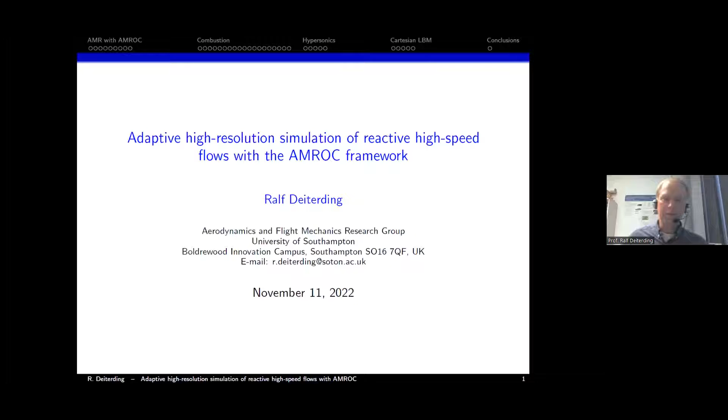Thank you very much for the very comprehensive introduction. I hope the connection will be working fine. If it goes down, I'll turn off the video.

You've seen the title of this talk. What's the motivation here? In this presentation, I want to explain the general sources that led me to the development of AMROC and what that system is about. It's a little bit larger than just combustion simulation. Let me start with an introduction covering my general thoughts.

What about CFD meshing? We are living in the third generation of CFD. The first generation used structured mapped grids, which are difficult to automate. The idea of AMROC always was to automate many of these procedures.

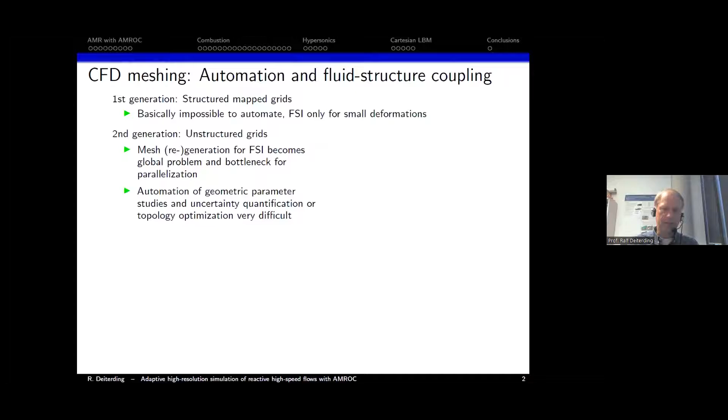The second generation would be unstructured meshes, with triangular grids. If you want to do fluid structure coupling—for instance, with a body moving through the domain—you get mesh stretching, and at some point you need mesh regeneration. This is naturally a bottleneck in such CFD simulations, because unstructured meshing is still basically a globally coupled problem.

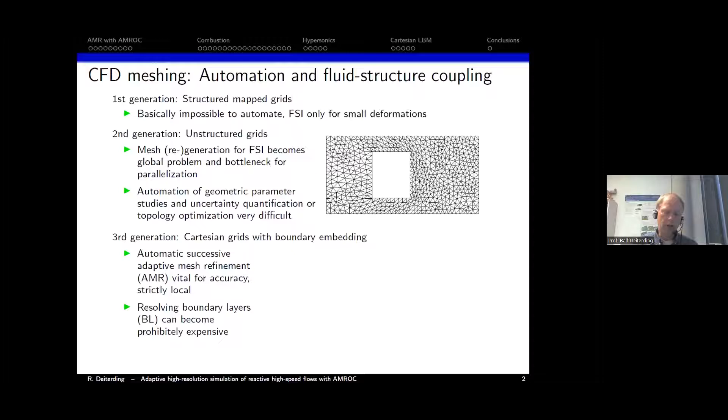Nowadays we live with what is called third generation CFD, which is about Cartesian grids where you can construct the grids much more locally and embed the boundaries, for instance with level set techniques. The problem there, as we'll see in AMROC extensively, is that you struggle incorporating viscous flows and boundary layers.

One direction we want to pursue with the software—and you'll see some indication of this in the presentation—is incorporating boundary layers through a type of overset mesh. The idea is to have a boundary layer mesh near the body, and in the background a Cartesian mesh with dynamic mesh adaptation. This approach nowadays is called strand meshing, where the core idea is that you grow the boundary layer mesh from an unstructured surface mesh, growing it in the normal direction. That's the overall idea I'm pursuing with AMROC.

I'll give some indication of these various approaches in the talk. Here's the outline: AMROC originally was an entirely Cartesian and structured system, and we'll see examples of what has been achieved. Nowadays we have also extended it to mapped meshes, and we'll see both of these in the big section on combustion simulation.

Then we come to a different class of reactive high-speed flows—hypersonics—where we have particular dissociation reactions. As a quick outlook at the end, I'll show how you can also use such a system to do quasi-incompressible flows with the Lattice-Boltzmann method.

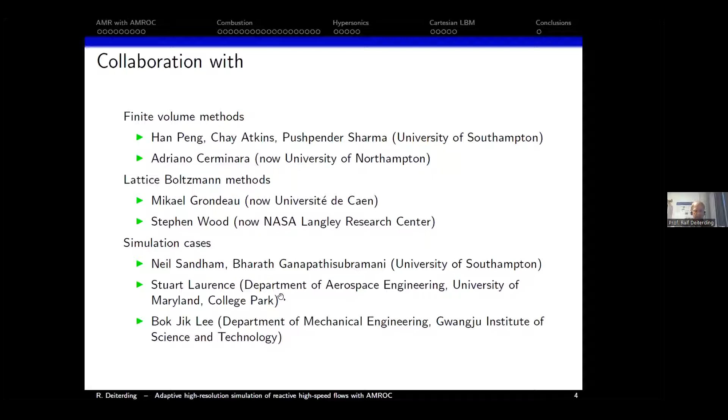In this approach, it is genuinely different from the flat layer unstructured mesh you would know in OpenFOAM. Instead of organizing the solver based on a single cell element, these solvers are organized based on the block, a rectangular block on which the discretization is formulated. When we apply the discretization, we do this on a sequence of blocks, looping over all the blocks, applying the discretization in each local block. But in each local block, you use IJK indexing to implement the discretization as efficiently as possible.

Through hierarchical refinement, we obtain an entire hierarchy. The point is that the higher level grids are not embedded into the coarser ones. The entire data structures remain unchanged, so we have big blocks over which we can sweep quickly, taking advantage of caches. Then the hierarchy levels communicate through prolongation and restriction operations, with interpolation and averaging.

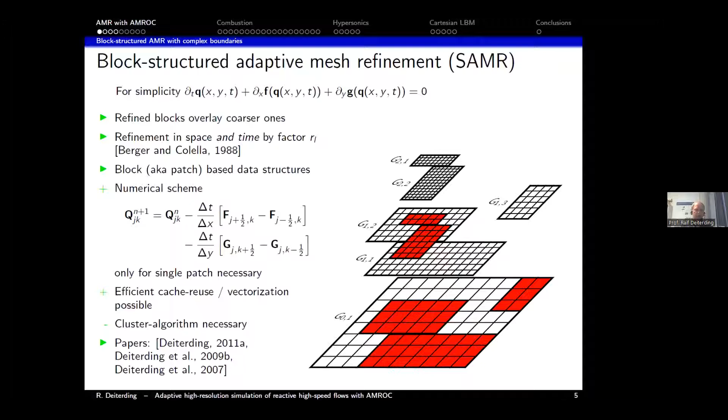In order to construct these blocks, they are based on the refined cells, but then bundled together. For that, you need a special algorithm, a so-called cluster algorithm originally from image analysis. I'm not going into the details, but these grids have to be specially constructed.

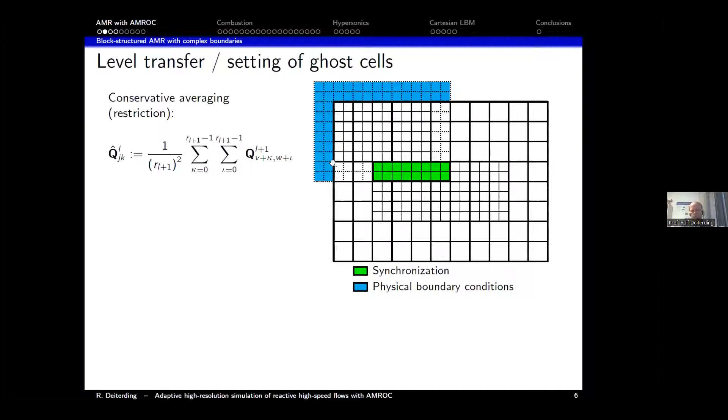Once we have these grids, they communicate with ghost cells. Here we see two grids on level 1, based on level 0, and around each of these grids you have a layer of ghost cells. The ghost cells are filled according to the requirements: if overlapping with a neighbor, filled by synchronization; if at the boundary, filled by physical boundary condition; the remaining ones have to be filled from the coarser grid by interpolation in space, typically linear or bilinear, to avoid overshoots and undershoots.

Then we have interpolation in time, because we do hierarchical time stepping. Once, for all the blocks on a level, you have set the ghost cells, you can then do the sweep over each block independent from the others. At that point, it becomes genuinely parallelizable.

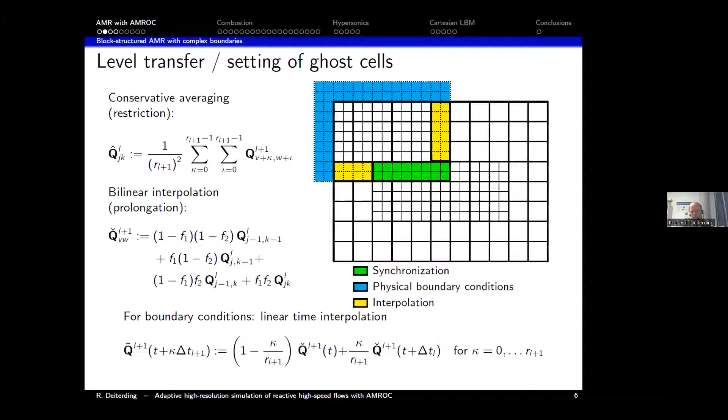An important operation in these procedures is to ensure this is mathematically entirely consistent. Because we are using Cartesian or structured grids, we get a situation that in finite element world would be called a hanging node. But in finite volume world, we have a coarse cell, and then we have several fine grid fluxes that we have to consider to make this mathematically consistent.

So instead of the simple finite volume formula we saw on the previous slide, we have to implement a finite volume formula that ultimately considers the addition of the fluxes in space from the fine cells, and also the fine fluxes in time. We have to implement this formula somehow.

In the Berger-Colella method, this formula is implemented through a correction method. In Berger-Colella, you first always update the respective coarser grids, and only afterwards update the finer grids using time interpolation on the boundary. So what we do is basically implement this with a so-called correction pass: you update the coarser grid, then update the correction element by the negative coarse grid flux.

Then you do the loop over the hierarchical time steps, and you add together the fine grid fluxes. When those levels have caught up with one another, you apply the correction term. Because we initialize this with a minus on the coarse grid fluxes, that gets eliminated, and all we remain with is the sum of the fine grid fluxes.

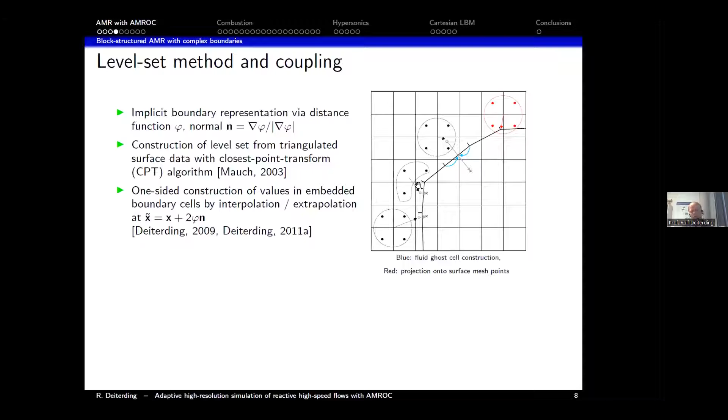You can see here that the stencil has to be adjusted, and you want to avoid a too aggressive extrapolation, because when you have shock waves, that can create significant overshoots. We would be extrapolating into the ghost cells the density and the pressure. The velocity you also extrapolate, but of course you have to flip it.

For instance, to impose a no-slip boundary condition on the boundary, or to impose a slip boundary condition with a certain wall velocity W, that is of course essential for fluid structure coupling.

With that, we would have an algorithm that we can use for fluid structure coupling, and fluid structure coupling in the VTF is done in a separated approach. So we would be doing a time step on the fluid, we exchange boundary conditions, we do a time step on the solid.

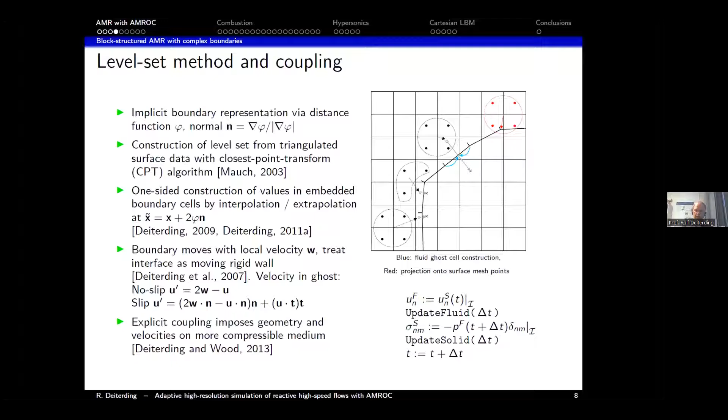That would be here if we do inviscid boundary conditions, where we only communicate the hydrodynamic pressures instead of the whole stresses. So with this embedded boundary technique, you have a very flexible methodology that works particularly well for inviscid flows.

Of course, now the point of doing level set methods is we can do heavily moving problems. Here we see a more sophisticated experiment, where the spheres are actually driven by the shock wave, and you see the agreement with the experiment and the simulation is excellent.

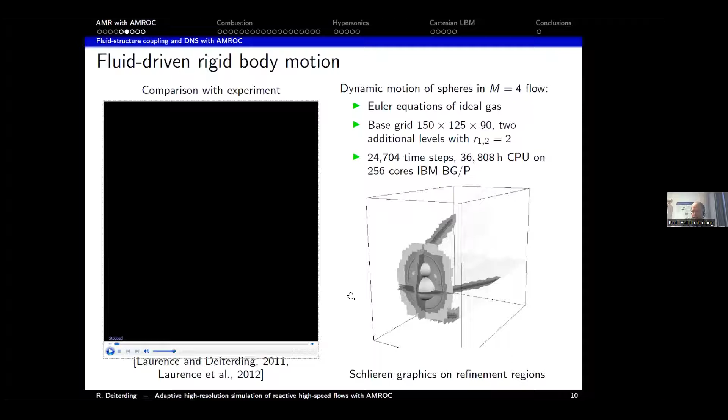Viscosity doesn't play much of a role, so our Euler solver can reproduce this really nicely. It is done with full mesh adaptation, and here on the right you see basically the mesh adaptation moving in this case, done virtually in every time step.

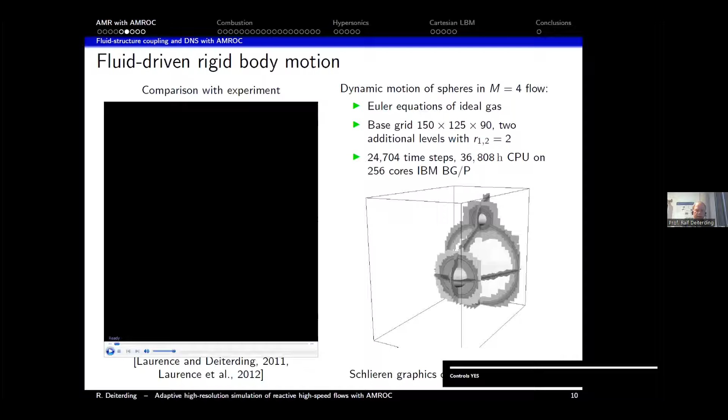That is generally quite different than with OpenFOAM, where you do mesh adaptation only very rarely. Here we would do mesh adaptation basically in every time step to ensure that the moving bodies are always embedded nicely in the finest level.

One word about parallelization, how this is generally done in AMROC. Of course, parallelizing these hierarchies is a relatively complicated load balancing problem, and in AMROC this is done with an approach called rigorous domain decomposition.

We would be adding together all the workload from the finer levels and projecting it down to level 0. All the workload from having finer cells and doing hierarchical time steps on them is projected down to level 0, and then the partitioning is done only on level 0.

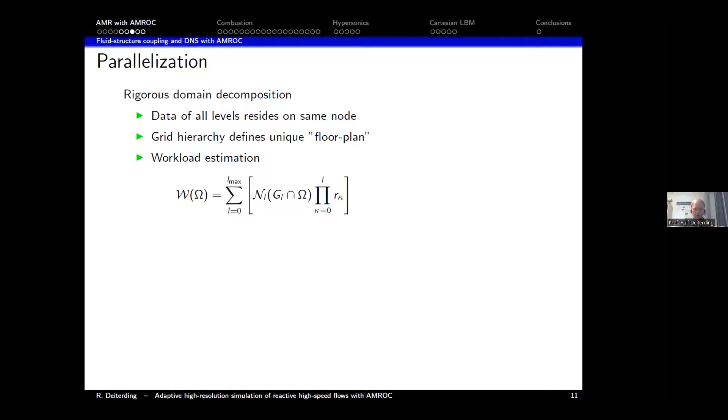And that is assuming and accepting certain smaller load imbalances, but it is done so that you can save the communication cost over the parallel machine between the levels, to have this strict locality. So that is the core idea here. Many of the operations can be formulated completely strictly local, and you don't have to consider communication.

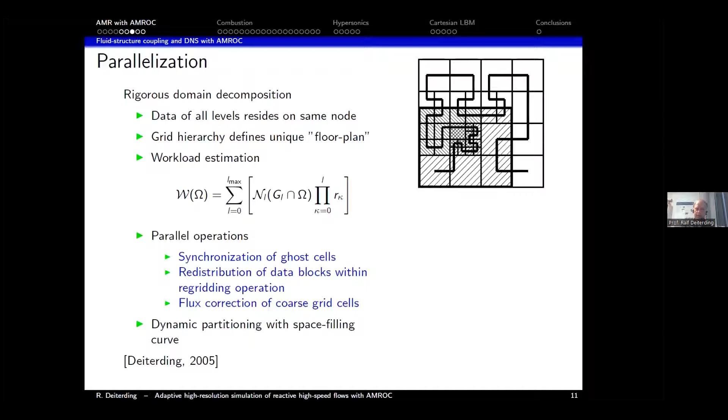So we construct a space filling curve for the partitioning that is common on structured grids. It's a space filling curve that goes through in a hierarchical, recursive way through the mesh. And then you can split it up at certain intervals, and that is then load balanced. Here we see the higher levels and the different amounts of workload.

So in the movie that we hopefully can see here, this is again this problem with the spheres, with the static spheres in 2D. And what you see is the different levels through the Z dimension, and the colors are the distribution to the processors. What you see in this movie, if I play it again, is basically how often the system is redoing the mesh adaptation. In every time step, it is possible with such a system on structured grids to change the grid dynamically. That is one of the strengths of these structured approaches.

Okay, turn off the video to be on the safer side.

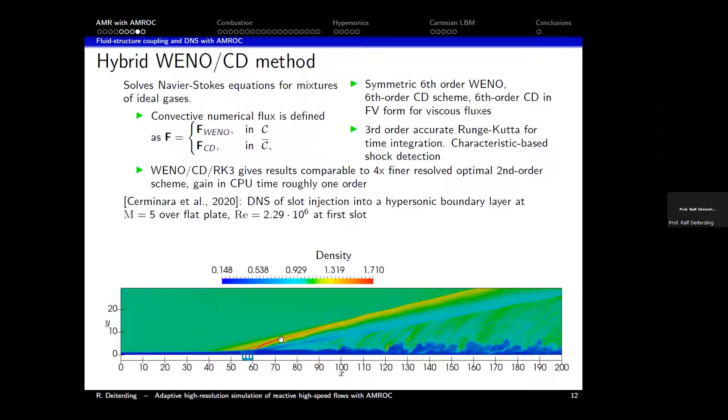So here we see a typical DNS example from a recent project. We have a hypersonic boundary layer into which some fluid is injected, and that is perturbing the boundary layer. We see here the dynamic mesh, and here basically the fluid, the cooling fluid, it's nitrogen, how it is injecting into the boundary layer.

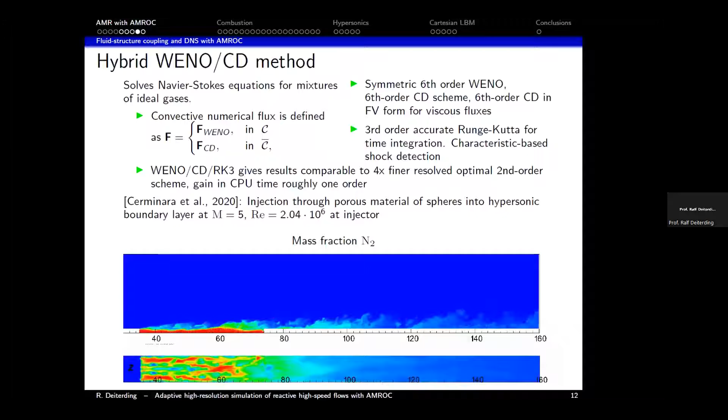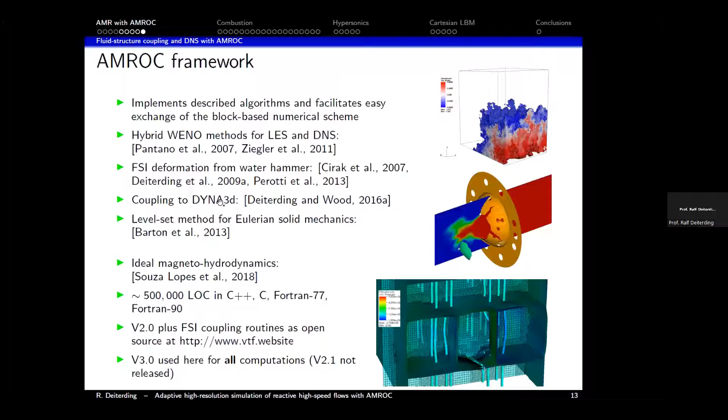The overall system is about nowadays 500, 600,000 lines of code, but the AMR system is smaller - that is only 50, 60,000 lines, but what makes AMROC so big are all these additional solvers, and also many cases. The version that you can find on the VTF webpage, version 2.0, is a little bit older, but you can also already do chemistry with it. It is a little bit restricted in capability - for instance, Dyna 3D is an export control program in the United States, and imminently this cannot be shared with the general public.

So now let's talk a little bit about combustion. I want to introduce combustion first with the governing equations. The governing equations here to consider are, of course, the reactive Navier-Stokes equations. I write them down here with a symmetry source term because this is useful to explain the machinery.

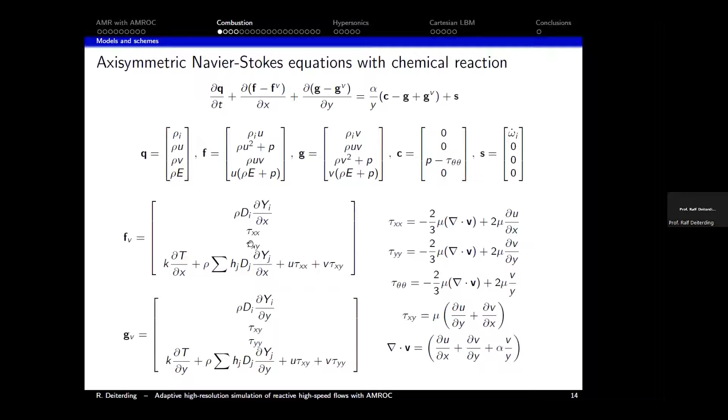So 2D with cylinder symmetry source term gives us, in addition to the chemistry, a symmetry source term on the right-hand side that we have to consider. And we have viscous fluxes, and we have inviscid fluxes. So here the inviscid fluxes, and then here the viscous fluxes.

So, how do we solve this now? Of course, it's a full chemistry model. The equation of state is complicated. The heats of capacity are temperature dependent.

So in that case, in these explicit solvers, we still have to go through an iteration in temperature in every finite volume cell when we want to evaluate pressure. This is due to this dependency of the heats of capacity and temperature.

The heats of capacity come from fourth order polynomials that come from the Chemkin database. And in AMROC, in the solver, actually the Cps and the enthalpies are tabulated to save some CPU time. And for the viscous parameters, viscosity, thermal conductivity, diffusivity, they are evaluated with the Chemkin-II transport library, which can also be quite expensive.

One thing worthwhile noticing: AMROC often doesn't use Chemkin directly for forward reaction rates, but uses a function for the reaction mechanism that is machine generated, and that is actually 2-3 times faster than Chemkin-II itself, a small computer science trick.

So the numerical methods vary on the inviscid Riemann solver, but particularly the Roe-HLL solver is the one that is heavily used. Then we incorporate the viscous terms with central second order finite differences. And important is, of course, the source term treatment.

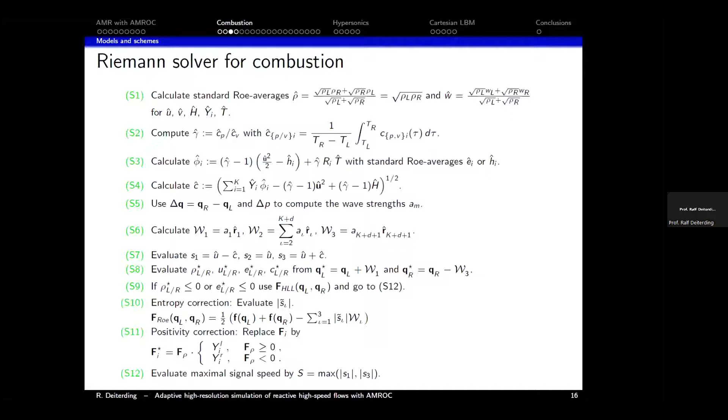And then there's an additional fix that corrects the fluxes to ensure that the mass fractions always remain strictly positive. And even in the second order reconstruction, special attention is paid so that the mass fractions remain positive. These pieces in the inviscid flux evaluation are critical, I would say, to the success of AMROC working so well - it's actually in the inviscid solver where the robustness comes from.

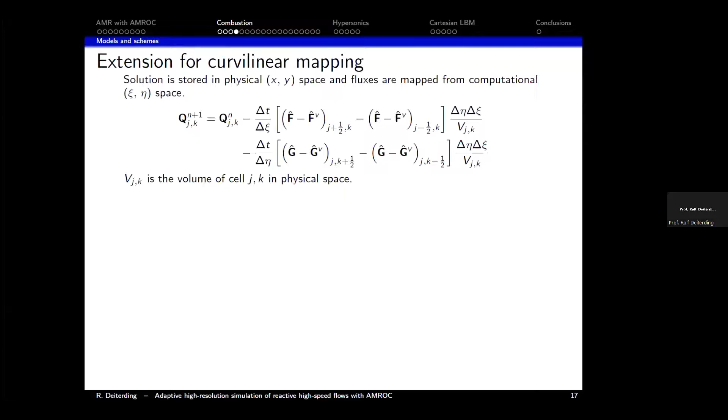Nowadays, we also have incorporated a mapping approach. Here, our general finite volume formula is transformed into arbitrary coordinates, and we still solve on the structured grid. Then, of course, we have a transformation matrix T that transforms from the computational grid to the physical grid.

And then we can still use our normal Riemann solvers in X and Y coordinates, and this result is transformed backwards with T to the power of -1, back into the physical space that we are actually working on. There's a similar decomposition on the viscous fluxes.

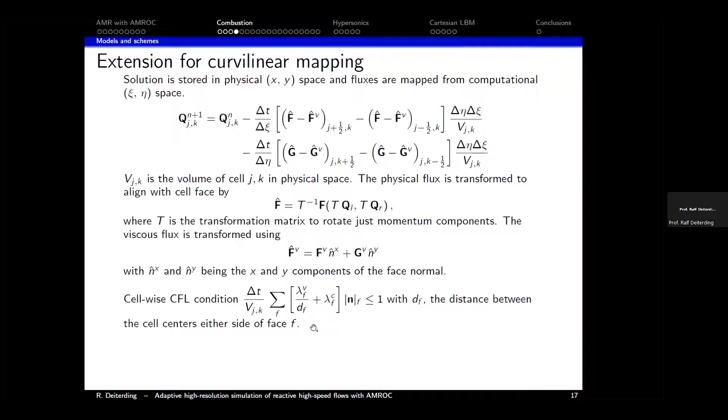Of course, on the map mesh, you have to make sure that you adjust the CFL condition accordingly, otherwise the solver wouldn't be stable. You have to consider the change of length scales on the map mesh.

So now let me show a few computations that are partially a little bit older cellular structure computations, because AMROC has been used quite extensively for that. When we simulate detonation waves, of course, we know that detonation waves are genuinely unstable in multi-dimensions, and people have devoted a lot of attention to simulating these cellular structures.

So what happens is that there is a transverse wave propagating perpendicular to the shock wave of the detonation wave, and there can be multiple of these transverse waves. When we have the right mixture and the right rectangular detonation tube, these cells can be very regular.

Yeah, so what ultimately happens at the cell front is that we have a Mach stem phenomenon that is moving up and down dynamically along the front. And because this is a very local phenomenon, it is very opportune to concentrate basically all the resolution with mesh adaptation at the front to resolve this.

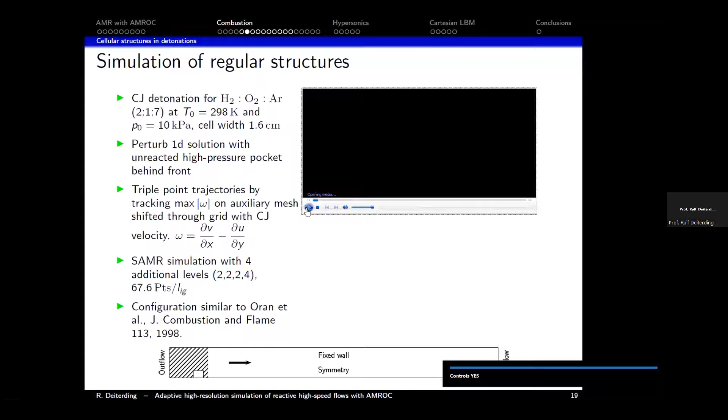So here we have a typical 2D computation that is now more than 15 years old, actually. And there you see in the right channel width, this is hydrogen, oxygen, argon with a Westbrook mechanism. So it is oscillating really very nicely.

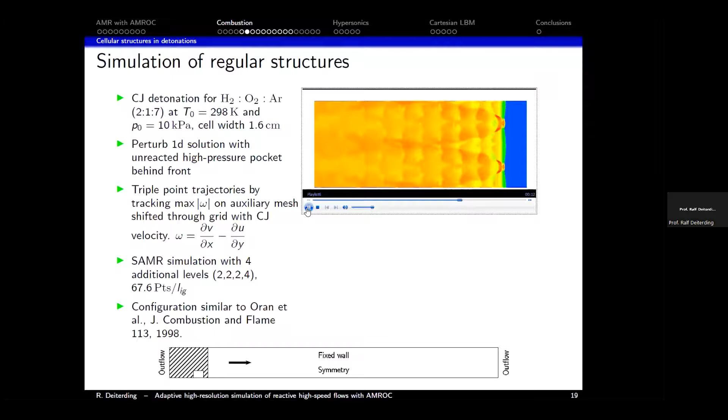You can visualize the mesh adaptation here, concentrated at the front. In the back, you don't need much mesh adaptation, because this is a strictly supersonic phenomenon. One can make such foils numerically by tracking the maximal vorticity or maximal thermicity over the mesh, and it produces these really nice detonation cells.

We would initialize these computations by painting in the 1D ZND profile and then perturbing it.

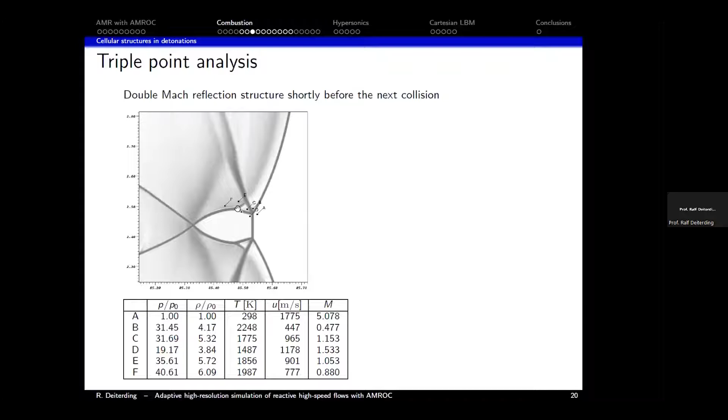Moving on, this is a Mach-stem phenomenon, and with AMROC you can evaluate this quite nicely. We find two situations in these Mach-stem phenomena. This would be a double Mach reflection, seen because we have a primary triple point and then a secondary triple point, and the reflected transverse wave is curved.

The alternative would be a so-called single Mach reflection situation, also called a weak structure, where you don't have this curved transverse wave. In the detonation world, it's called the strong structure when we have this curvature and the secondary triple point - that's the double Mach reflection situation.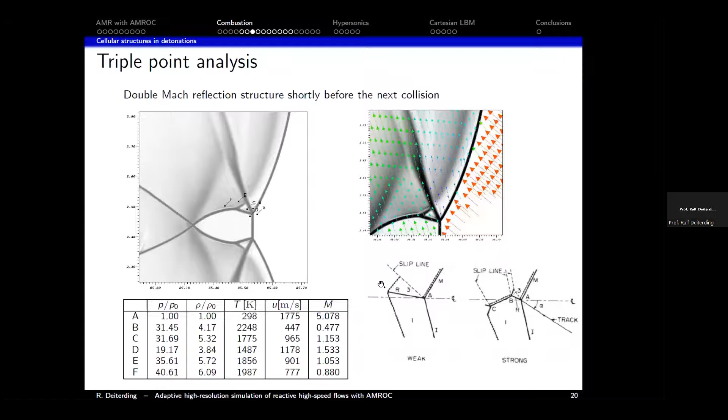With AMROC and the embedded boundary method, something I did about almost 15 years ago was simulate this in pipe bends. This is not solving the viscous equation but the inviscid equation, with very high resolution. When there's significant curvature in the pipe bend, the detonation decouples - the shock wave and the reaction front decouple, and the detonation partially extinguishes in the bend.

Then this wave comes back and the detonation gets reignited, and eventually continues back to the original oscillation in terms of transverse waves. But because of this retonation phenomena, interestingly, the largest pressure maximum in such a computation is not on the outside of the pipe, but on the inside.

Here we see some of the adapted mesh - this is the overall phenomena. If the pipe bend is very modest, the cells basically stay but get altered a little. When the bend is more pronounced, we get partial detonation decoupling, so here we get a so-called marginal detonation, and then actual detonation failure and reignition. But eventually the detonation goes back to the original oscillation.

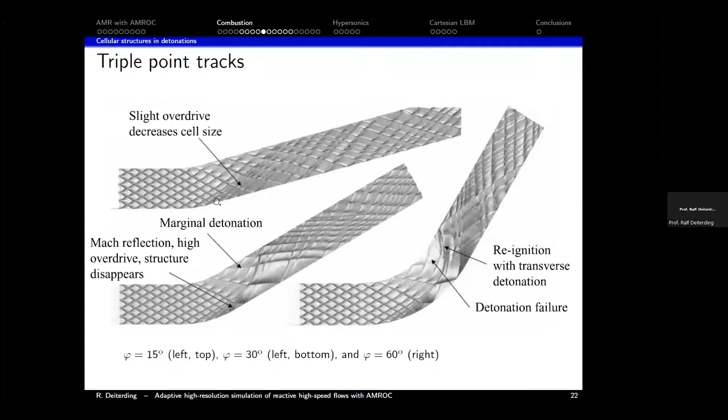What's also interesting is seeing how these triple point tracks have partially shifted their shape. When they become very linear and straight, that indicates single Mach reflection. When they are very curved, this is a double Mach reflection phenomenon.

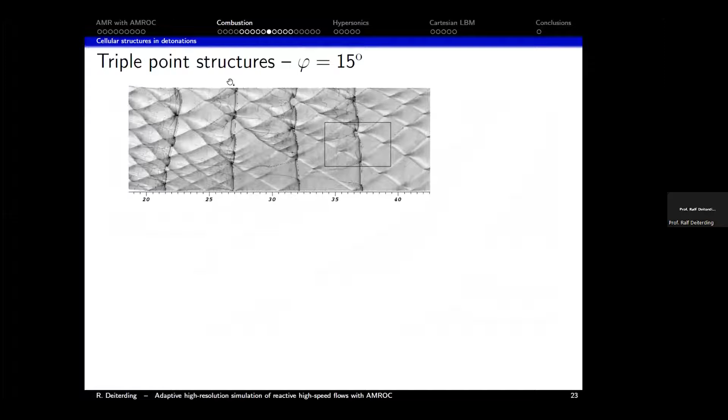Here we have these triple point tracks with multiple detonation fronts painted over, and an enlargement. In the enlargement, due to this transient situation, we have both types of triple points present in the same simulation, close to one another - here the double Mach reflection structure, and here the transitional Mach reflection structure.

You can clearly see that the second triple point is there next to where the other triple point is. This is a nice indication that this is not a numerical phenomenon, but actually true physics we are seeing, and that the resolution is sufficient to capture it.

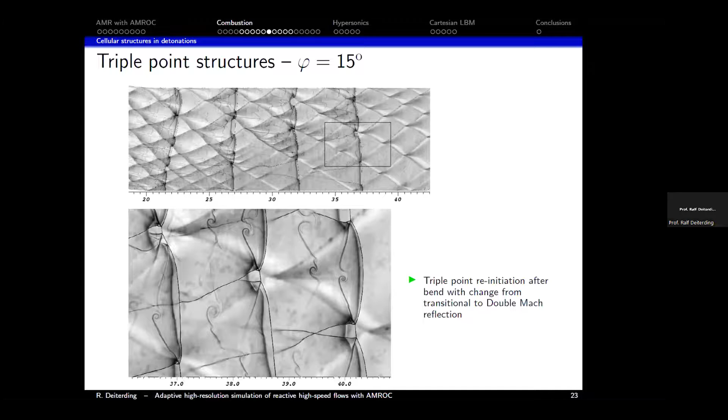Interesting to see, for instance, is this situation when we zoom in - a situation where many of these triple points are actually coming together. When too many of them are close to one another, there isn't enough energy release in the mixture to sustain them all, and several of them will die out.

When they die out, they also die out as single Mach reflections, and their trajectories become very straight as they fade. You can see them really fading here, and this is also physics - it's not numerics that's causing them to fade.

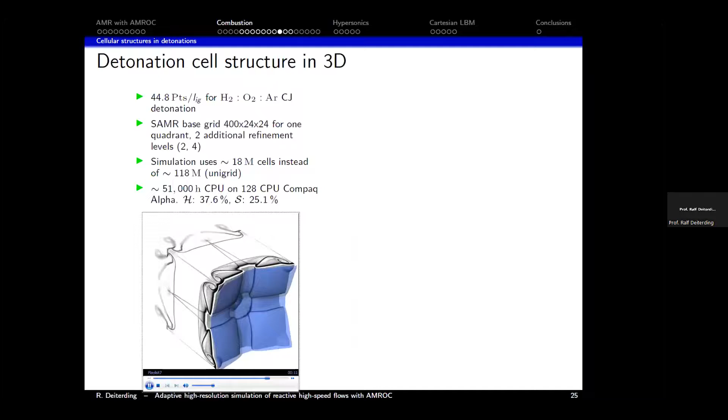We can simulate this equally in 3D. It's also kind of an old computation already, 15, 16 years old now. What then happens in 3D on a rectangular channel is you get a situation where Mach reflection and Mach reflection come on top of one another, and this is when the front gets very curved.

Here the detonation is particularly locally accelerated when we have Mach reflection together. On the other hand, when we have incident waves together, the detonation is slowed down more than before. So in 3D we would have more oscillation along the front than in 2D. That's happening along the front, but on average, in 2D as in 3D, the whole phenomenon is of course propagating with the original CJ detonation velocity.

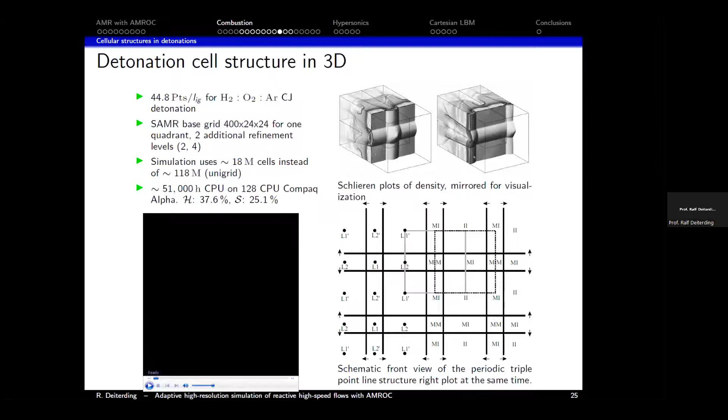Here's a case where we now do this with our new mapped mesh solver, a new computation by Han Peng, where we do this now in a 90-degree bend tube. We see the adaptive mesh and the wave going through. This is now done with the new map mesh solver. The pipe has the dimensions of 2.5 detonation cells multiplied with 1, to make it kind of tractable.

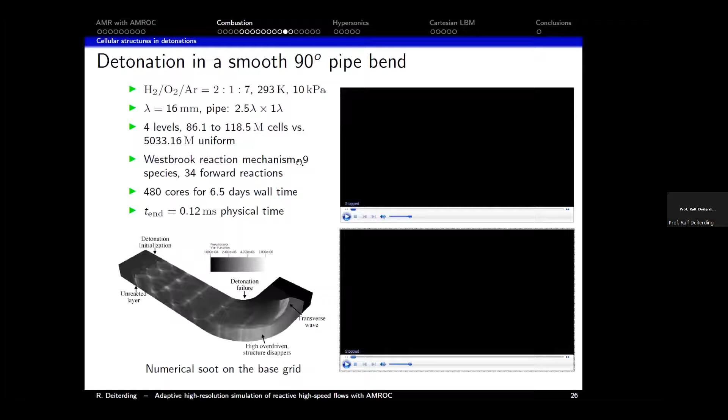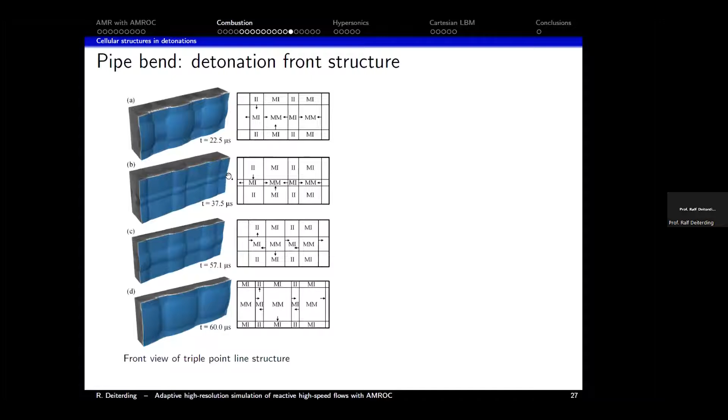We see again the detonation front with these situations: Mach stem, the MI situation which is a mixed situation, and incident. And when it's going through the bend, many of these triple point lines fade out.

Another computation we did with our new map mesh solver is this canonical test case of Lehr. In this test case, there was an experiment where projectiles are shot through a reactive mixture of hydrogen and oxygen, with velocities all close to the detonation velocity, so we are getting shock-induced combustion, a replication of the detonation phenomena on the front of the projectile.

Because it's replicating detonation behavior, we also replicate this oscillation with the transverse waves in this configuration. Triple points in this case are initiated at the stagnation point in front of the projectile, and the frequency at which these triple points are generated is very characteristic and very tightly coupled to the velocity of the projectile, to the Mach number. So this is a really sensitive test case.

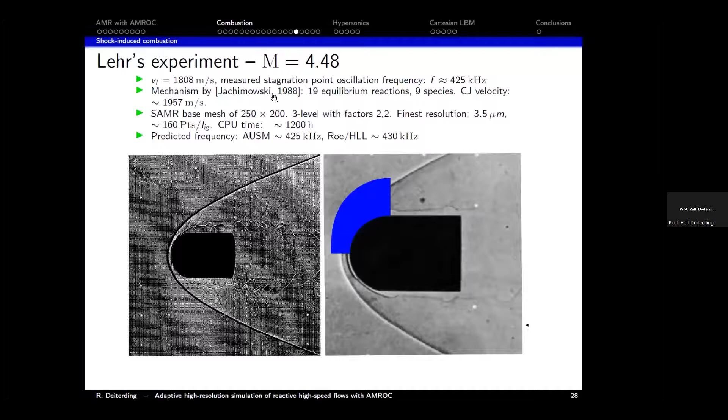So we use here the Jachimowski mechanism, which works quite well but not for all Mach numbers. This is basically what we have found: that in these cases the weakest link is basically the combustion model. So here we see the new solver creating the triple points, and the dynamically adapting mesh following the triple points. This is working quite nicely.

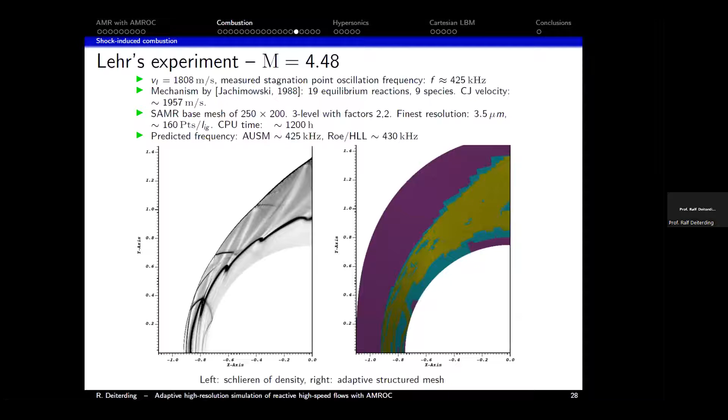The reason we really developed this new map mesh solver is because we want to do rotating detonation engines, like are currently very popular. I also want to mention we carried out an RDE experiment in the UK. I supervised this together with Charlie Ryan, and so we built the first RDE experiment in the UK. It's a very tiny RDE, using mass flow rates in total smaller than 10 grams per second.

It's running on ethylene and oxygen, but it is showing the kind of right behavior. With 9 grams per second, we have about 3 detonation heads or quasi-detonations, and with 6.6 grams, we have 2 heads.

And with 3.5 grams, we have only one head. We are looking here with a high-speed camera into the inside, and you can see the detonation heads. We also had pressure transducer data, so we are quite confident on what we are seeing.

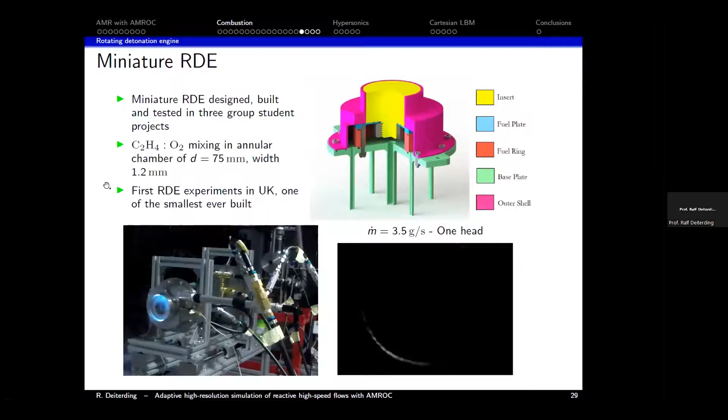But it's a hard experiment to simulate because it is so small. So all the deficiencies that you would find in a rotating detonation engine, from the friction, from the heat losses, from the mixing, is very pronounced in this experiment. But we are still trying to simulate that.

And what we found is if we use pre-mixed injection, here we now use our new mesh solver with adaptivity. You see the detonation is initiated, and then the wave is circling. And of course, you see how the mesh adaptation follows the wave quite nicely.

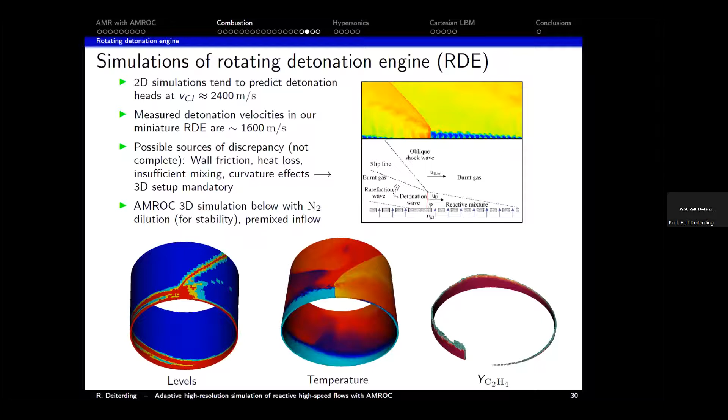Here's from the bottom, we see the ethylene injection. And what we found is, like what many people found in RDE world, is if you have pre-mixed gases already for the injection, you are getting detonation velocities that are virtually always the Chapman-Jouguet velocity. However, in our experiment, we are approximately 40% smaller. This gives indication for all the impurities, and I think it is particularly the mixing between fuel and oxidizer that is to be blamed for these very low velocities in the experiment.

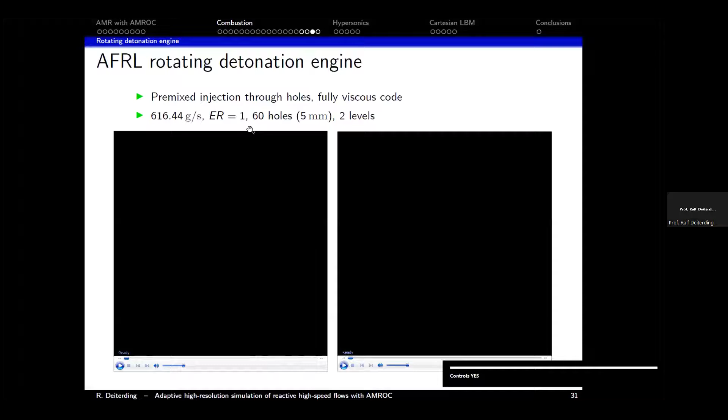In order then to have some RDE results that are closer to experiment, we simulated an engine from the Air Force that is running on hydrogen and oxygen, and hydrogen and air. That has a significantly larger mass flow. So here the mass flow is more than 600 grams, and the deficiency is a lot lower.

The injection is done through these spherical holes, it's not over the entire plenum. And you can see that this is transitioning here to 2 detonation waves.

This is a truly viscous computation. As we can see here, when the waves are propagating around, you really see that the front stays everything but planar. So we get truly detonation boundary layer interaction already here at the fronts. This is clear indication that this is already a viscous computation.

And in this case, it was still kind of pre-mixed. We still are predicting something like almost CJ velocity for the detonation speed. And the experiment, because it is larger scale, that is also closer to the Chapman-Jouguet velocity.

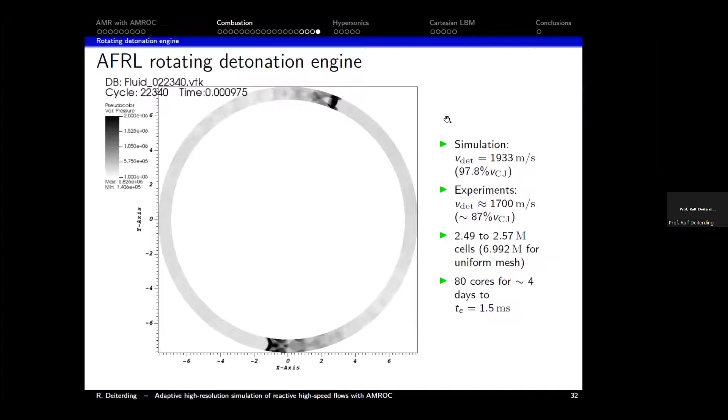Okay, so I have a little bit time left. So let me give a little bit of an outlook to other high-speed flows that we are doing with AMROC, and particularly the strand mesh approach. So we integrated that into our newest hypersonic solver.

So it's a hypersonic solver that is using a 2-temperature model. The previous computations used, of course, a thermal equilibrium assumption, and in hypersonics you would use thermal non-equilibrium assumptions. Particularly, you want to incorporate the non-equilibrium and the temporal delay that would typically happen in vibration. So here we do this with a 2-temperature model, where we have an additional energy equation for the vibrational energy. There's a reactive source term, and that reactive source term typically represents the dissociation reactions.

So here we have a decomposition of the various degrees of freedom in the gases, and we consider it with a translational temperature and a vibrational temperature. So translational-rotational temperature is used for translational and rotational degrees, and then the vibrational temperature is used for the vibrational degrees as well as the electronic excitation degree. So this is a common approach, and it comes from Mutation++ that we use here.

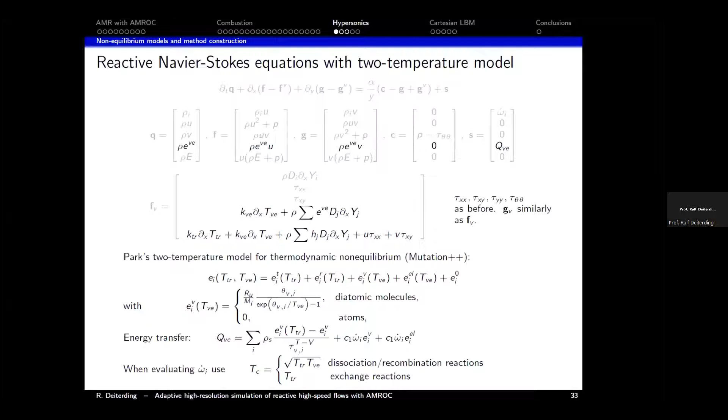And then the chemistry gets evaluated ultimately under the assumption that you can combine the 2 temperatures by multiplying them and taking the square root. That is very different to what is done in Chemkin, but it is kind of an accepted model in this world. So this model is after Park, and it is implemented in the Mutation++ library. But you can guess that if you're making these kind of assumptions, you can't use standard Chemkin to simulate that, because the whole reaction mechanism is differently calibrated, since it's using this oddly combined overall temperature.

So we do this now with our new strand mesh solver idea, where we have boundary layer meshes living in a Cartesian background mesh. So how do we grow the strands? Here it is depicted in 3D, but our solver so far is 2D.

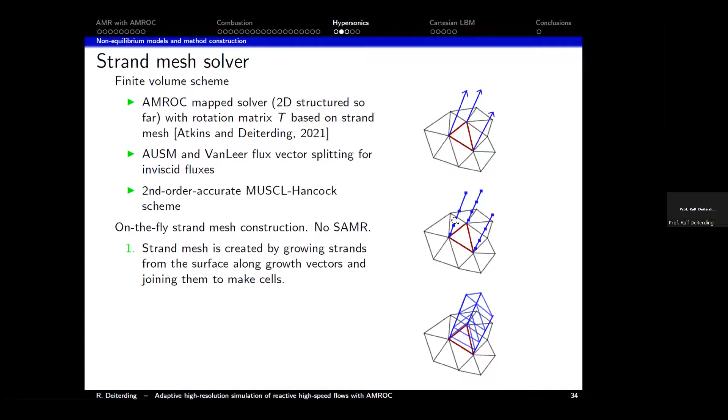You would be growing in the normal direction from the surface triangulation, and of course growing typical boundary layer cells. What you have to consider is that if you just grow in the normal direction and you have corners in your surface mesh, your cells would potentially be of very low quality.

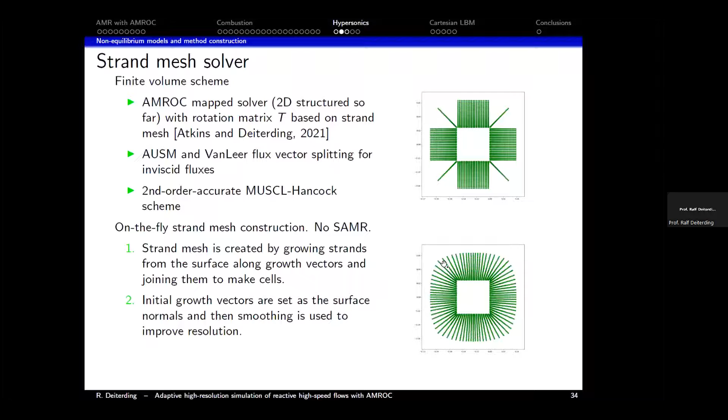This is nicely depicted here. What you need to incorporate is some smoothing so that the delta X on the boundary layer cells is more intelligently distributed. So it is not a straightforward implementation in that sense.

What can also happen is that you get clipping phenomena, where in this growth process the normals can overlay, and then you have to clip away some cells to make the solver consistent. That's one of the reasons why such a solver in 3D is far from trivial. In 2D, it's a bit easier.

So then we have our boundary layer mesh, and that now needs to be embedded into our background mesh. For the embedding on the Cartesian background mesh, we can happily use all our level set machinery that we had implemented already before.

From the AMROC perspective, this embedded solver looks like an extended surface, nothing else, so we could reuse a lot of the routines. But the two overlaying meshes have to communicate in the red cells, so you need to exchange boundary information. For that, we implemented an additional bilinear interpolation operation so that we can interpolate from the new map mesh onto the Cartesian mesh.

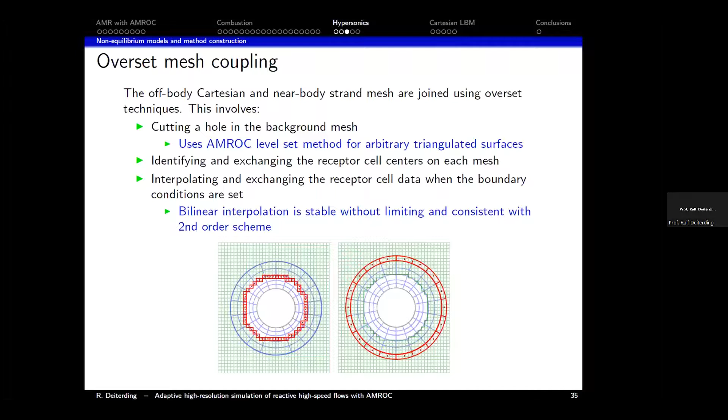So let me show some results. What is popular here is cones in hypersonic flow - these are typical laboratory experiments. Here, for instance, we have a double wedge, a double Mach reflection situation, and that is forming nice Mach reflection patterns.

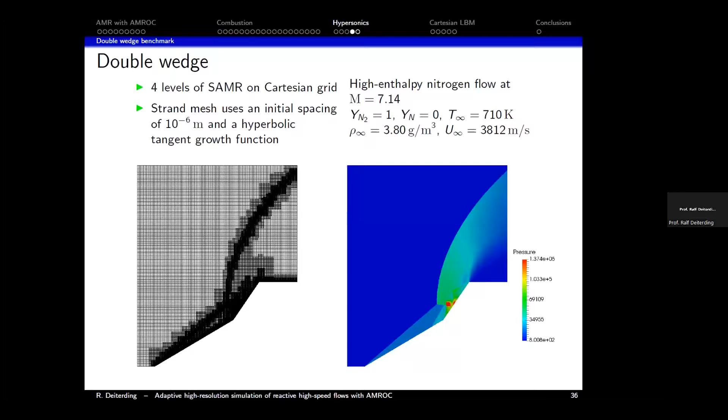This is using the model with dissociation. We have to zoom in a little bit to see the phenomena. We have our boundary layer mesh near the surface, and the Cartesian mesh is dynamically adapted. You want to pick the resolution of the boundary layer mesh outside similarly to the Cartesian mesh on the finest level, to make it consistent.

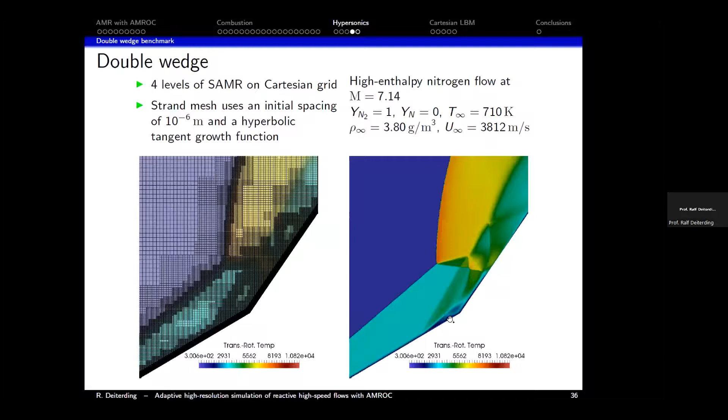Vibration always lags behind considerably temporally compared to translation and rotation, so the vibrational temperature really gets excited only much later. Similarly, dissociation would take even more time, so the nitrogen dissociating is happening very far down in the flow. This is a nice indication for our two-temperature non-equilibrium solver that is necessary for these kinds of problems.

So here's a comparison between experimental results and US3D, a very popular hypersonic code. You could argue that the AMROC results are actually slightly closer to the experiment than US3D, but it's working quite nicely.

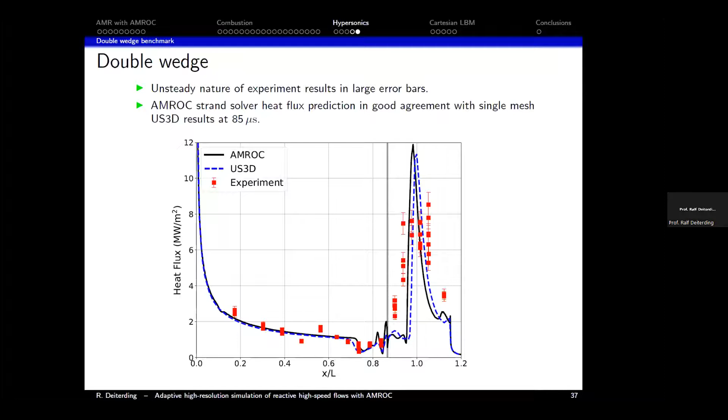Okay, so finally, a last outlook onto Lattice-Boltzmann methods - switching gears here. AMROC is a strictly explicit system, and we have implemented this Berger-Colella technology, but it seems to be far away from doing incompressible flows as you're used to in OpenFOAM.

An alternative is solving quasi-incompressible, weakly compressible flows with the Lattice-Boltzmann method. The Lattice-Boltzmann method is strictly explicit - it doesn't require implicit iteration, and it works by solving the Boltzmann equation, which is principally a six-dimensional equation.

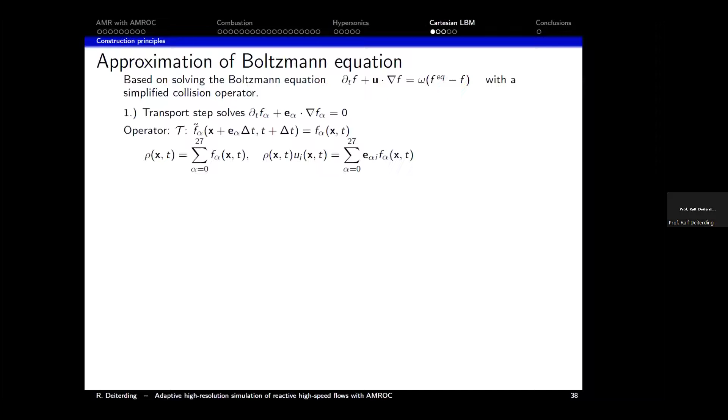In the Lattice-Boltzmann method, this works such that we actually break apart the velocity space into discrete velocity directions. For instance, one stencil that we are using is the D3Q27, where we discretize the velocity space in the Boltzmann equation with 27 directions, and these 27 directions are pointing exactly to the next stencil point.

So what you then do is propagate these density distributions. If you need to evaluate macroscopic quantities, like density or velocities, you do this by computing the moments, meaning you sum them all together. So then you are transporting these quantities, always with the speed of sound in the lattice-Boltzmann method, meaning from one lattice point to the other.

After one transport step, you do the collision, and the collision comes from the Maxwell distribution. One computes the deviation to the Maxwell distribution with second order or with third order. This all seems a little bit obscure. We can also evaluate the pressure.

The important thing out of all of this is that with the lattice-Boltzmann method, one can prove that for vanishing Knudsen numbers, this approximates the weakly compressible Navier-Stokes equations. So we end up with a solver that equally approximates the weakly compressible or even incompressible Navier-Stokes equations, but it is strictly explicit, doing it by explicit operations on a Cartesian grid.

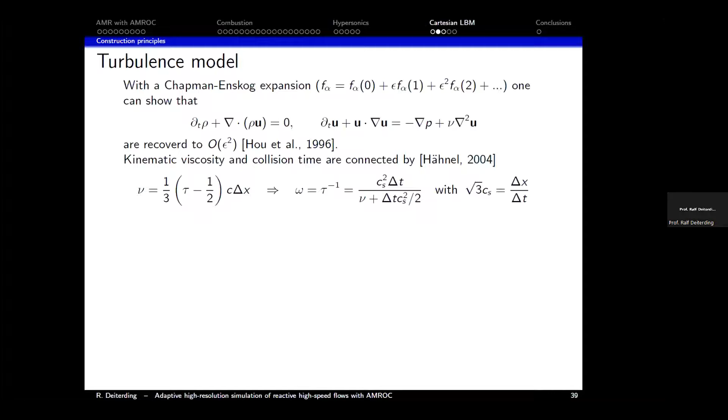So this solver type perfectly fits what AMROC has been constructed for. It gives a perfect opportunity to solve slow flow problems on the same computational machinery, without having to deal with incompressible pressure correction iterations using a linear solver, as you used to know them in OpenFOAM.

One can also work out how the viscosity and the collision time in this method are connected to one another. And of course, here is the relation.

If we want to incorporate turbulence modeling, the lattice-Boltzmann method needs this too. This is done by adding a turbulent eddy viscosity. So one needs a turbulence model like in OpenFOAM, and what works easiest with the lattice-Boltzmann method are basically eddy viscosity models, where we just add the turbulent eddy viscosity to the physical viscosity.

What would be a problem is implementing, for instance, RANS-type turbulence models where we have additional transport equations, because we would have to add them to the F in a consistent way. That is a problem. But LES models, where we can take everything out of the microdistributions on their own, work very well. So that's what we do.

Large eddy simulation, and of course there is mesh adaptation with AMROC, and the whole Berger-Colella machinery is completely unchanged with the lattice-Boltzmann method. So this is one special thing in AMROC: we have implemented adaptive lattice-Boltzmann methods completely consistent with Berger-Colella AMR.

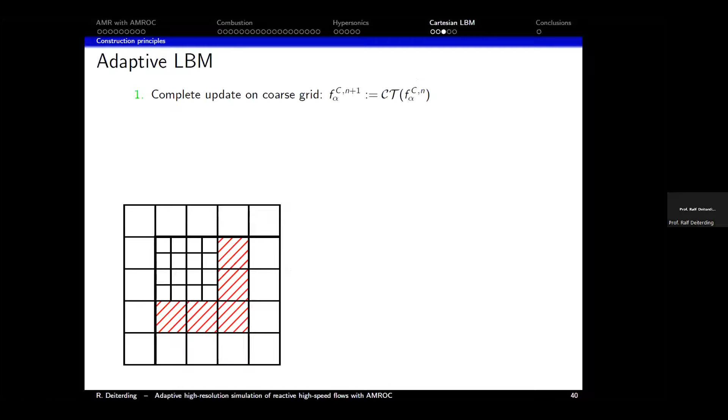The only thing that needs adjustment is the flux correction at the coarse-fine boundaries. So how does this work? In the lattice-Boltzmann method, we have this funny stencil that also goes in diagonals, and we do not have fluxes anymore, nor this linear flux formula that we can correct.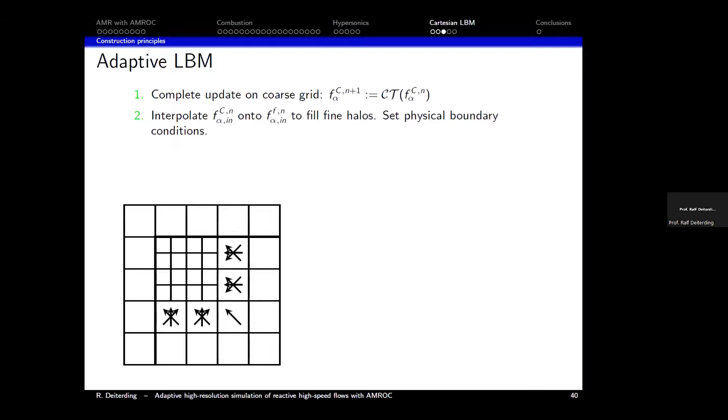So what we do for the adaptive method is: we have these distributions that are moving into the fine grid cells, and you see here the transport in diagonal direction as well—different from Cartesian finite volume methods. They are put on the ghost cells of the fine mesh, get transported in, and you have the collision. At the same time, distributions are transported out. So that's a combined picture.

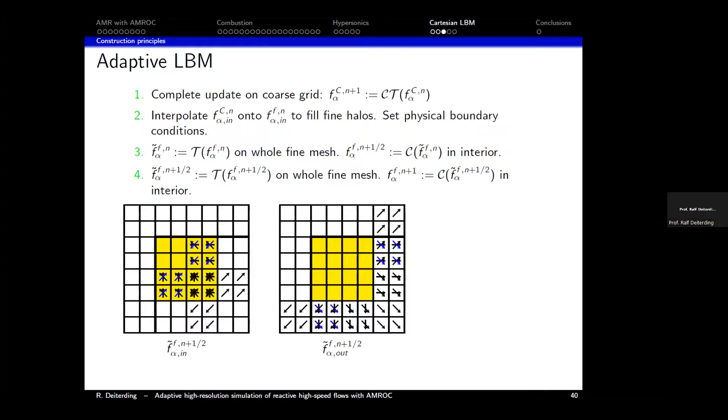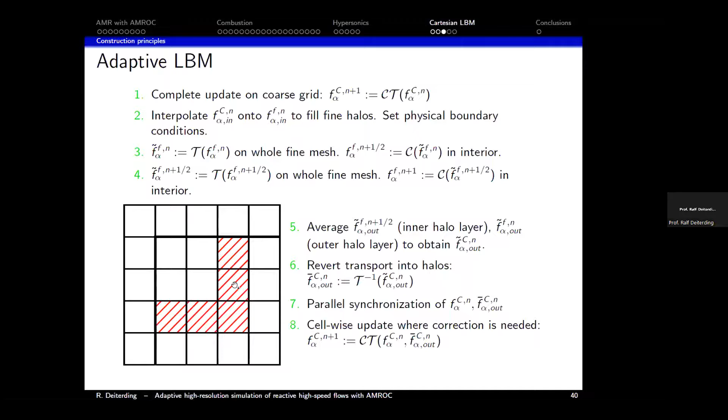Now these distributions need to go onto the coarser mesh. This is accomplished by coarsening them, then basically moving them backwards and repeating the lattice-Boltzmann step just on the coarse grid cells. That gives a means of implementing the lattice-Boltzmann method completely consistent on the hierarchical mesh, and it is 100% compatible with the Berger-Colella method.

I think I was the first one putting out the algorithm in this order, making it 100% compatible with Berger-Colella AMR. The big message here is that we can do adaptive lattice-Boltzmann, accepting this correction at coarse-fine boundaries, 100% with the same codes as the finite volume methods. Also, the lattice-Boltzmann method lives on finite volume discretization, not finite difference discretization as many people do. But like that, AMROC is totally unchanged.

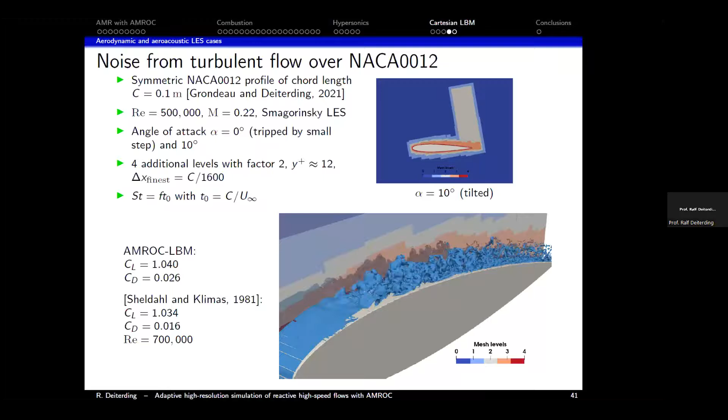So here are now a few quick results with the lattice-Boltzmann method. This is, for instance, aeroacoustics over an airfoil, very high resolution, but it's a low Mach number problem—Mach number 0.22, Reynolds number 500,000, and it's a typical LES. So we see the flow.

And then we do a direct aeroacoustic analysis. We have the microphone here at point P, and we evaluate the spectral behavior when the airfoil is at 10-degree angle of attack and then at 0-degree angle of attack. You can see that at 10-degree angle of attack, there's a lot more noise at higher frequency than at 0 angle of attack. But it works quite well.

The Lattice-Boltzmann method is very attractive for that because it propagates with the speed of sound, so it has the acoustic perturbation included. And because we have this exact transport from lattice point to lattice point, the Lattice-Boltzmann method on the Cartesian grid is also exact when it comes to advection.

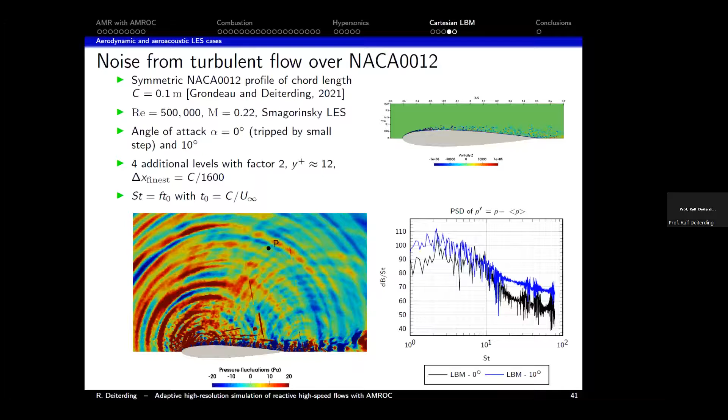So it is a method with very low numerical dissipation, extremely good for very high accurate DNS and LES. This is also why we used it in this project over porous media, where we are evaluating flow over porous media.

That brings me to the conclusion. AMROC is designed to provide on-the-fly mesh adaptation for the fastest structured implementation of explicit schemes. The system itself is in C++, and the discretization living on the block is in Fortran 77, Fortran 90, or for the Lattice-Boltzmann method, completely in C++.

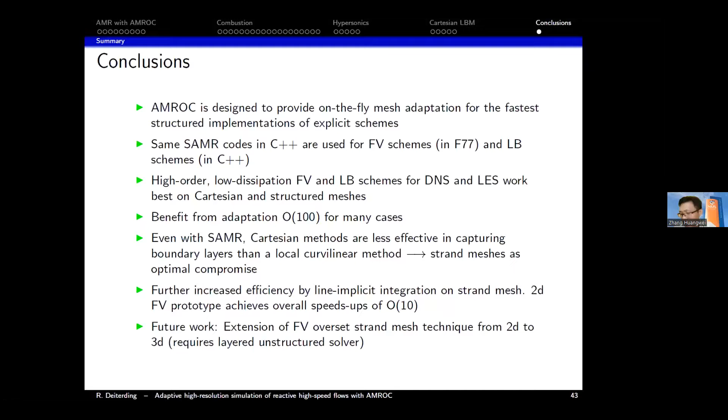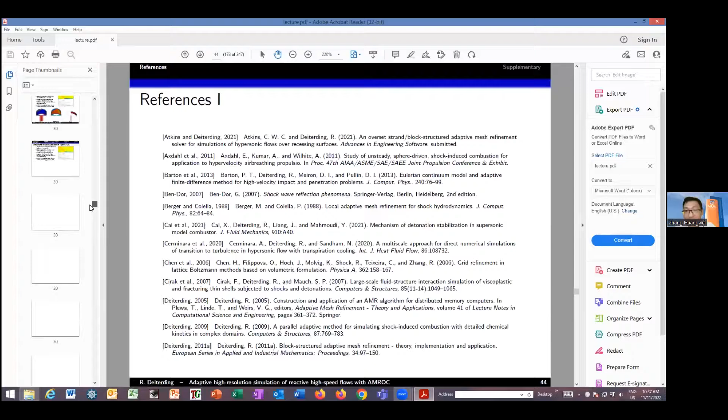Another question is about your RDE case, I think on slide 13. Is that a non-premixed or premix case? These are all premixed for the time being, with discrete inlets, spherical ones. We also have non-premixed computations now, but I wasn't able to include them for the time being. So it's still kind of a demo computation.

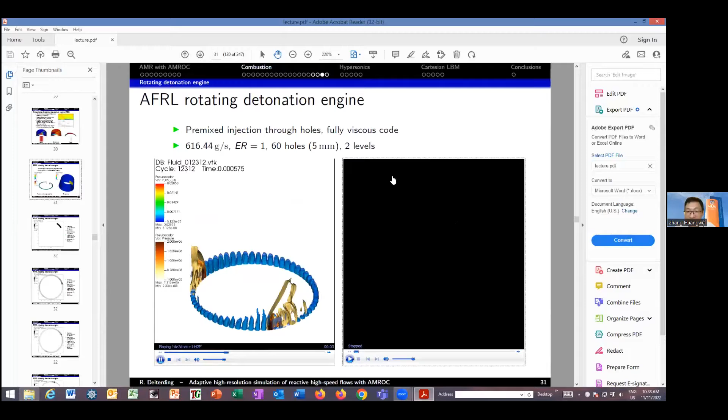You mentioned mixing is probably one of the factors. Absolutely, we have indication of that. It's only that I have these results, this is Han Peng's latest work. You cannot have everything and a complete RDE yet. I think in 6 to 12 months we should have very sophisticated computations also with non-premixing and a high maturity on this kind of cases.

Ralf, we can't hear you now. I think we should turn off the video, that's probably better. Okay, thank you very much for answering my question. There's another one from Prof. Zhicheng, you can see it from the chat. Hello Ralf, oh okay, I see.

Do you have any comments on the OpenFOAM AMR engine regarding flux interpolation? I do not have any comments about that specifically, since I do not know the details, but of course this is a crucial situation. The refluxing business across fine interfaces is, with all these adaptive solvers using hierarchical meshes, where it becomes mathematically tricky. You can run computations very happily entirely without the refluxing, and the results usually will differ only very, very marginally.

For instance, in most chemistry cases, we might not even run with flux correction. It is when you do very sophisticated error analysis and really measure the second order or higher order of your scheme that the flux interpolation really makes a difference. But because of that, flux interpolation errors can't be determined easily just by eyeball norm, which gives people implementing solvers a lot of leeway. This is why this component might be quite incorrect in many solvers, and most users wouldn't even see it.